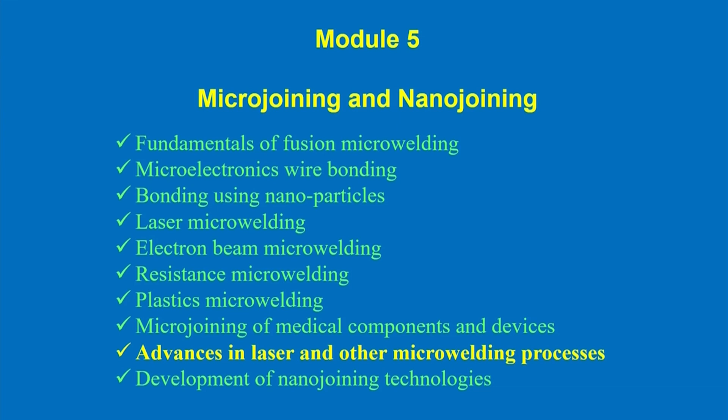All the different micro joining and nano joining technologies exist in the current perspective, that means depending upon current applications. First I will try to cover the fundamentals of fusion micro welding processes.

Although the basic features of fusion welding are already known to us, specifically this fusion micro welding, we will discuss in what aspect it can be applied in micro scale processes.

Second, different micro electronics wire bonding we will try to discuss, because nowadays the electronics industry involves a lot of joining processes.

Then bonding using nanoparticles we will try to cover, and then we will be covering laser micro welding processes, using laser as a source for welding. It is known to us, we have the idea about different laser welding technology, but how this can be used in micro scale applications, we will try to focus on in this module.

Next, electron beam micro welding. We know that electron beam is normally used when there is a need of high depth of penetration, specifically for high thickness material, but electron beam can also be applicable for micro scale welding processes. In this case we need to use this source of electron beam in a different way. We will try to discuss these aspects.

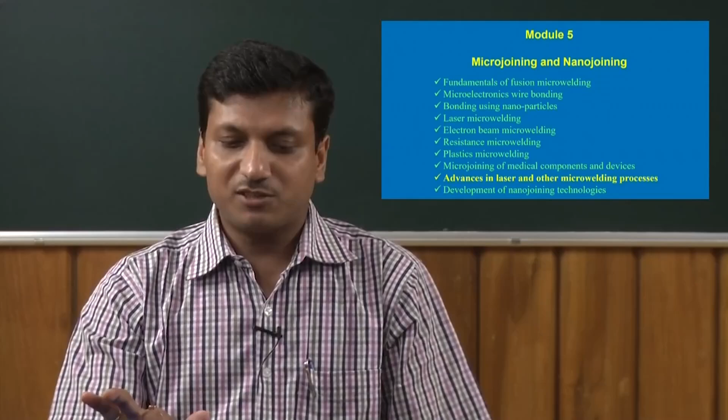Now, if we see the difference in these two cases, in microplasma arc welding process, the dimension of the fusion zone or size is different from the laser welding processes. Of course, in all these cases the materials are same. In all these cases what we have done is we have tried to join two different sheets of titanium alloy.

So, grade 5 titanium alloy is formed in the form of a butt welding configuration, and we use different heat sources. In one case we use plasma source, in another case we use laser as a heat source, but we find there is a significant difference in the shape and size of the fusion zone. This is possible because the concentration of heat in these two cases is different, and that depends on the different welding technologies.

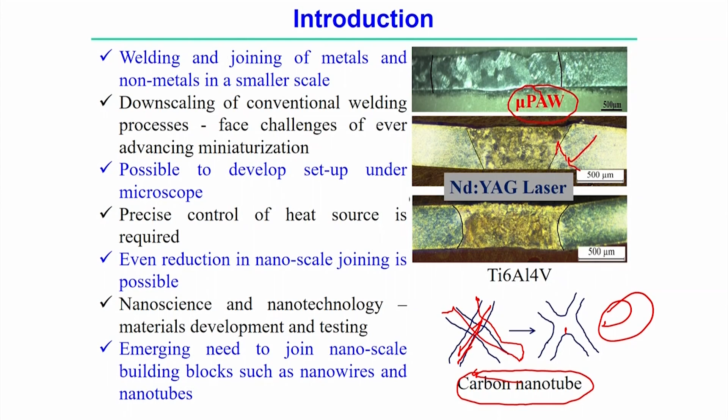So this type of joining, we can say, is nano joining, and you can imagine how precisely it is necessary to control the nano joining process.

Now what is the definition of micro joining or nano joining processes? Joining means welding, brazing, soldering, bonding, all together can be considered as joining processes. Specifically, welding is when we try to fuse two materials, and if we reach the melting point temperature, and after melting the solidification occurs between the materials and it comes back to room temperature, that type of joining is called welding, in general.

There may also be mechanical joining, for example fastening, riveting, crimping, which also comes under joining processes, but here we will focus only on welding, brazing, soldering, and specifically solid state bonding processes at different scales - two different scales of all these joining processes.

One is the macro scale, another is the nano scale. There is no strict definition of micro joining, it's mostly related to conventional welding and joining processes, but the only difference is the characteristic dimension. We can differentiate from conventional welding to nano joining or micro joining processes.

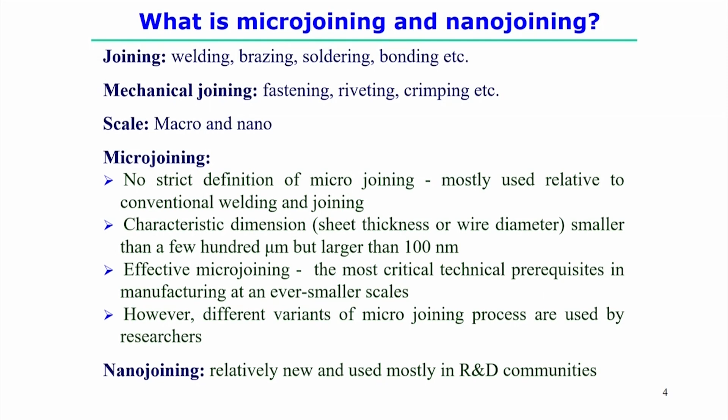We will try to see what are the different micro joining technologies presently being used, and what are the developments of different micro joining technologies up to the current date. We will try to see that.

In another aspect, nano joining is an almost new aspect mostly used in R&D laboratories. Commercially, we do not yet use these nano joining technologies, but it is evolving, and maybe we can use these nano joining technologies for nano devices or nano electronics.

Before looking into the different technologies and techniques that exist in micro joining or nano joining, we will try to see what mechanisms or principles are responsible, or what way we can explain the different nano joining processes from the basic principle or mechanics.

To start with the basic mechanism of the micro joining or nano joining process, we can consider two ideal surfaces, both perfectly clean, meaning there is no oxide layer on the surfaces and they are atomically flat. Atomically flat means that if we see at the atomic scale, the surface should appear completely flat. This is of course a very ideal case, but in this ideal case, if these two surfaces come together, they spontaneously join by the interatomic forces.

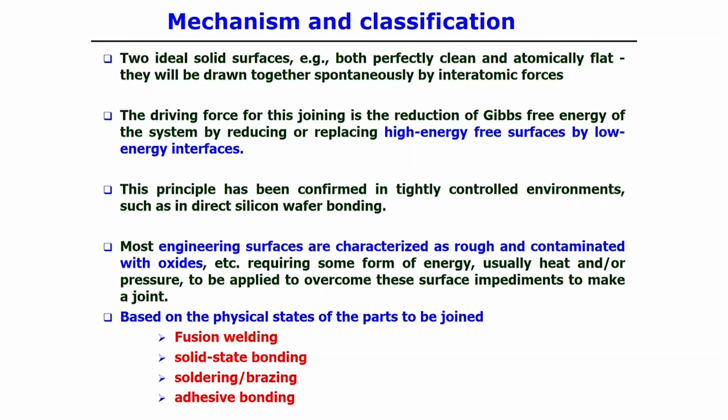Based on this principle, or the physical states between the two parts to be joined, specific to micro joining processes, we can divide micro joining into four classifications: fusion welding, solid state welding, soldering or brazing, and adhesive bonding.

All these types of welding technologies exist in conventional welding processes, but only these four types of methodologies exist in micro joining. So micro joining in general can be grouped according to traditional welding processes, into these four types. But the question is, is this classification applicable for nano joining processes as well?

Let us see. If we look at this table of typical micro joining and nano joining processes, we see solid state bonding, soldering, brazing, fusion welding, and adhesive bonding. Under solid state bonding we have different types: wafer diffusion, ultrasonic wire bonding, cold welding, explosive welding, friction stir, and friction welding.

Next, under soldering and brazing we have diffusion, furnace, induction, laser, reflow resistance, wave, vapor phase, and fluxless soldering. All these welding processes belong to micro joining, under the category of soldering or brazing. Next is fusion welding.

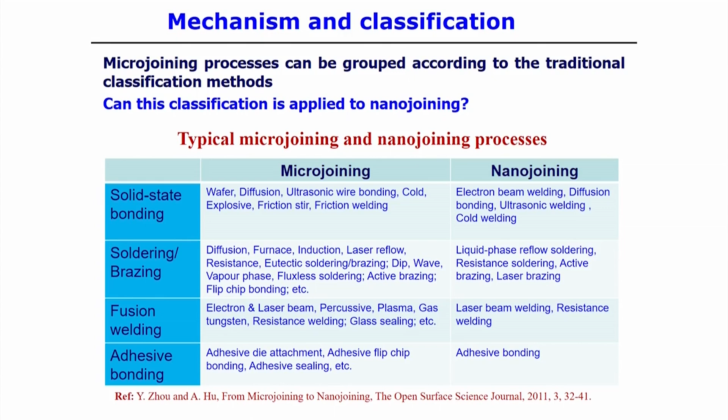Next, laser beam welding and resistance welding are typical nanojoining processes under the categorization of fusion welding process. Finally, adhesive bonding can also be applicable in case of nanojoining processes.

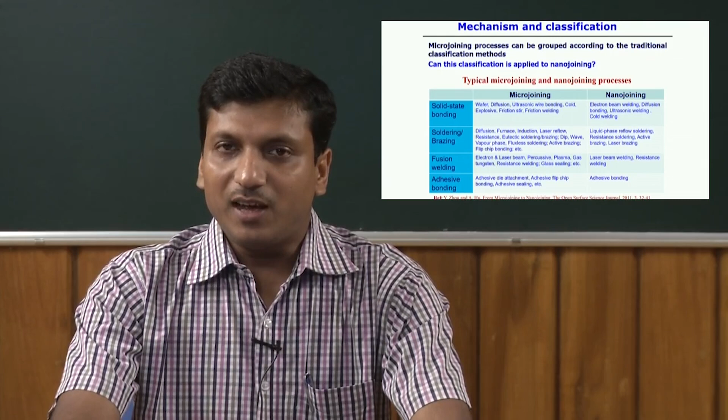Of course, different nanojoining technologies have also developed, and are still developing, but there is a little bit of difference as compared to conventional welding processes, or maybe with respect to microjoining processes. These typical aspects we will be discussing at the respective point of time.

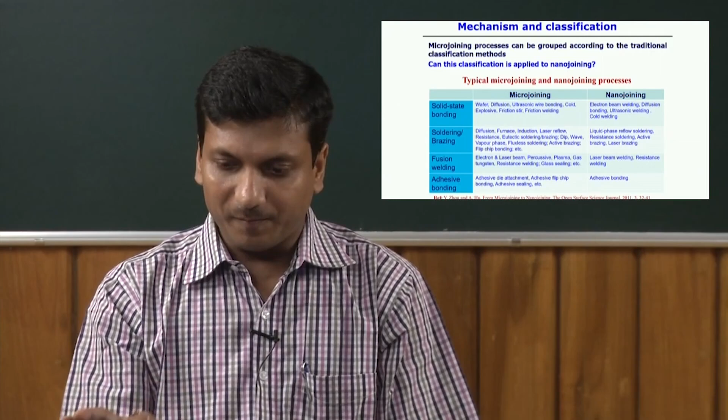Now focus on the fundamentals of fusion micro welding. What are the different techniques for micro welding processes? We already described the different types, but what are the basic needs for the development of the technology for micro welding processes?

First, we need to control different variables very precisely, such as voltage, currents, and travel speed. This is also applicable in conventional welding processes, but it is still very important in micro welding processes. For example, we can use laser in micro welding, but it is more useful if we consider the pulse mode of energy, because compared to continuous energy, pulse mode energy is applied for the microjoining application in a very controlled way.

In a pulse, if you look into this picture, during the pulse-on time we generally apply the thermal load to the sample or specimen, and during the remaining time solidification happens again.

Basically, if we see the average power, it is also below the peak power, as shown in this figure. So here we can say that ramping of the power is possible in the pulse mode of laser welding process, and by ramping the power we can use laser specifically for the micro welding process, which is very much similar to the conventional welding process as well.

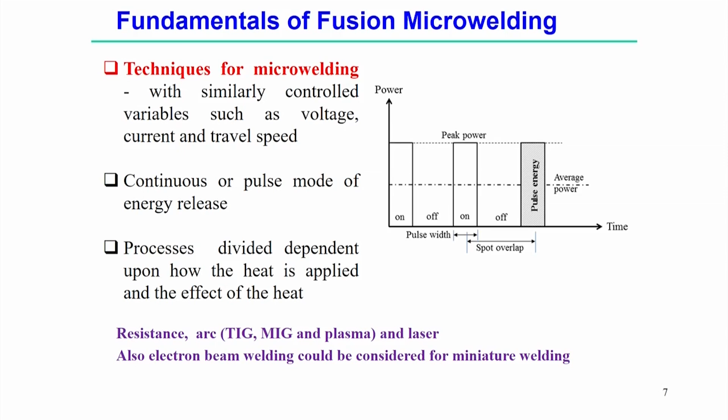So laser can also be used for micro welding processes. Of course, electron beam welding can also be considered for micro welding application, but the prospect is different - in a different or more controlled way we can use the electron beam for micro welding application.

So fusion micro welding can be further defined as: when the sheet thickness of the materials is less than 0.5 millimeter, or the tubular material diameter is less than 1 millimeter in diameter, that can be considered a fusion micro welding process. So geometric size is restricting the definition of micro welding process as compared to conventional welding process.

But the basic phenomena of the formation of the fusion welding process: first is the application of the heat source, that means thermal aspect. Then mechanical aspects, meaning how efficiently it is possible to design the fixture and holding devices to hold the sample or move the sample - that is the mechanical aspects.

Finally, what type of residual stress and distortion level is achieved in case of micro welding processes, that comes under the mechanical aspects. And finally the geometry aspect, that means the shape and size of the samples which we are supposed to process in micro welding applications.

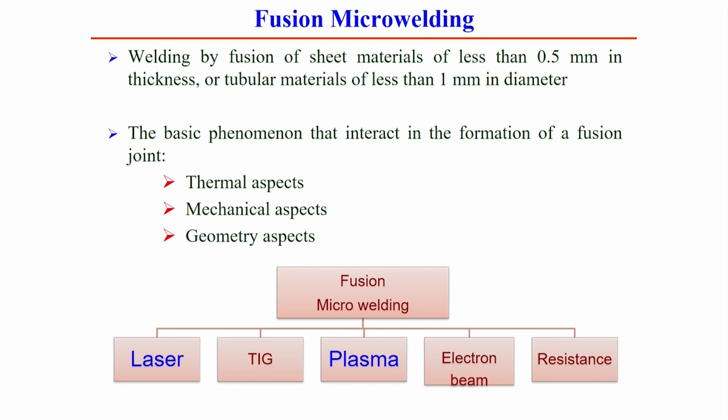So fusion micro welding, these are the typical welding processes we use. One is laser, mostly used. TIG welding process, TIG means tungsten inert gas welding, or GTAW, gas tungsten arc welding process, can be used for the micro welding application. Then plasma, or microplasma arc welding, can also be used for micro welding applications. Then electron beam and resistance. So these five types of fusion welding processes are applicable for the different micro welding processes.

Let us look into the typical application area of the micro joining processes. Mostly microelectronics, medical, aerospace and defense industries have a lot of applications of different micro joining technologies. Definitely packaging and other interconnects in MEMS, micro electromechanical systems, is where we generally find this application of micro joining.

Other applications include medical implants, lamps and lighting assembly, jewelry industry, dental applications, aerospace, batteries, thermocouples, wires, TV parts, sensing devices, electronics, instrumentation, and also molds, tools and many other small component work we are supposed to join.

In these cases we find this typical application of micro joining processes following the different micro welding processes. It may be a fusion micro welding process or it may come from other micro welding techniques.

Resistance micro welding - sometimes we use this process, but in this case it is mostly used for joining non-ferrous materials, specific to micro welding applications.

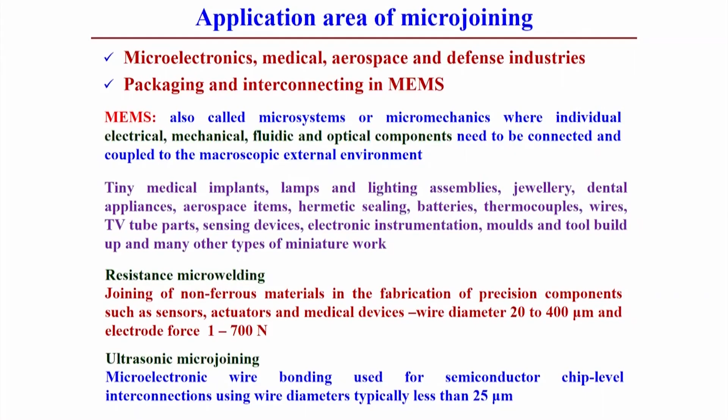Now we look into that. It is also used in MEMS, micro electromechanical systems or micromechanics, where the individual electrical, mechanical, fluidic and optical components need to be joined. So all of these need to be connected.

You can use different micro joining technologies, and specifically in this MEMS application there is a combination of metallic and non-metallic or different types of components. So there are different types of micro joining technology that are specifically used in case of MEMS.

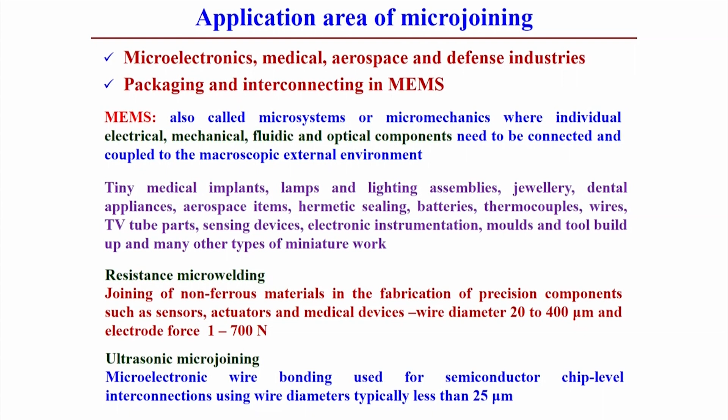Now again, if we come to fusion micro welding processes, arc welding is an important joining process. We know that for several decades arc welding has been one of the most leading welding technologies, generally used in conventional welding processes, but this arc welding can also be applicable in case of micro welding process.

In this case it is very much required to have very regulated and controlled output of less than 1 ampere arc current, the current used to create the arc welding process can be controlled at that level, maybe less than 1 ampere, then it is applicable in case of micro welding processes.

Mainly gas tungsten arc welding and plasma welding are used for different micro welding applications, but in this case it can also be used in continuous mode as well as pulse mode of the arc can also be possible to use in micro welding applications.

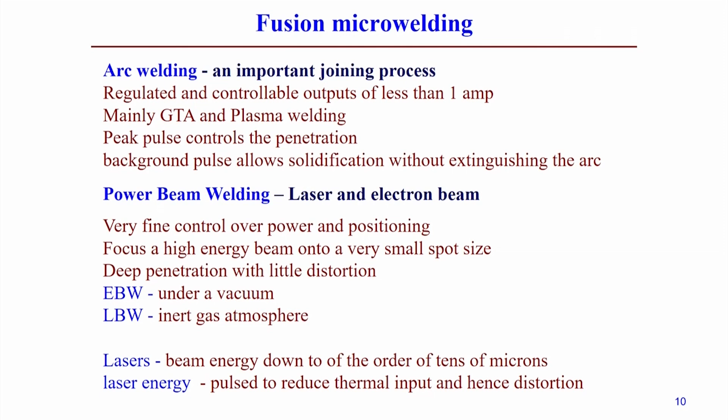Of course, power beam welding is another categorization of the fusion micro welding process. Here we can use laser or electron beam. Very fine control of the power and positioning is required in this case, and we know that both laser and electron beam can be focused in a very small area.

That's why there is a wide application observed in case of micro welding process, specifically for laser. At the same time, deep penetration with low distortion type of welding can also be possible using both laser as well as electron beam.

The difference between laser beam welding and electron beam welding is that electron beam welding, all the melting phenomena happen under vacuum. So there is no interaction of the outside atmosphere during the welding process, which is advantageous to get a very good weld joint.

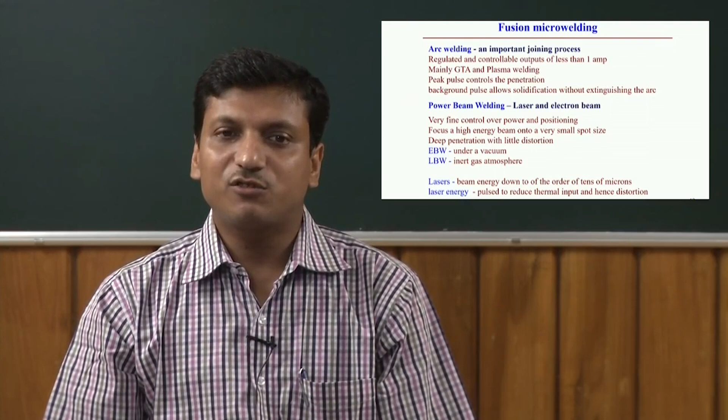Laser beam welding also occurs under an inert gas atmosphere, which reduces interaction with other atmospheric elements in the welded joint. So here also we can produce a very good weld joint, but it has unique advantages as compared to the electron beam welding process.

Looking at typical characteristics of laser welding, laser light is generally used for micro welding applications with pulse duration at the millisecond level. It is also possible to generate ultrashort pulses at the femtosecond, picosecond, nanosecond, and microsecond levels. But conventionally, micro welding applications use pulses from the millisecond down to the femtosecond level.

The basic advantage of laser welding is that it is a non-contact mode, and since the heat is concentrated in a very small zone, the size of the fusion zone and heat affected zone is very small. So during welding it may not affect surrounding materials, which is why laser welding is very popular and useful specifically for micro welding processes.

Compared to laser welding or electron beam welding, microplasma arc welding is another variation of micro joining, relatively low cost compared to laser welding. Nowadays microplasma arc welding machines are available with low amperage capability, meaning even at the level of 1 ampere current it is possible to control using that machine, making it applicable for micro welding processes.

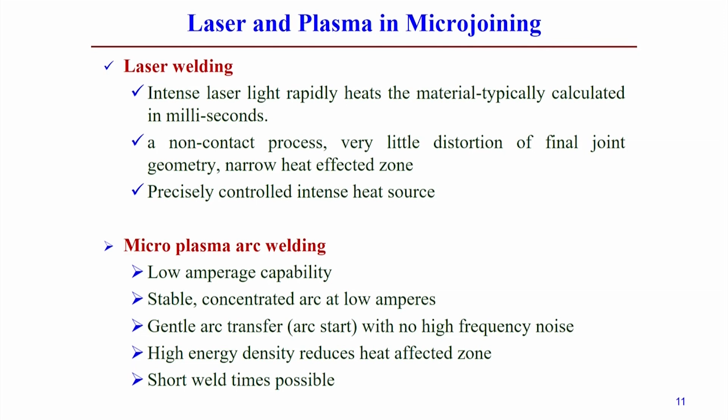Apart from this, a stable and concentrated arc is also possible even at low ampere current. That is the basic advantage for which microplasma arc welding was developed for micro welding applications. The gentle arc transfer happens with no high frequency noise, and high energy density reduces the heat affected zone, though not as much as laser. Short weld time is possible, but not comparable to laser in quality, only in cost. Still, microplasma arc welding is a secondary option for micro welding applications.

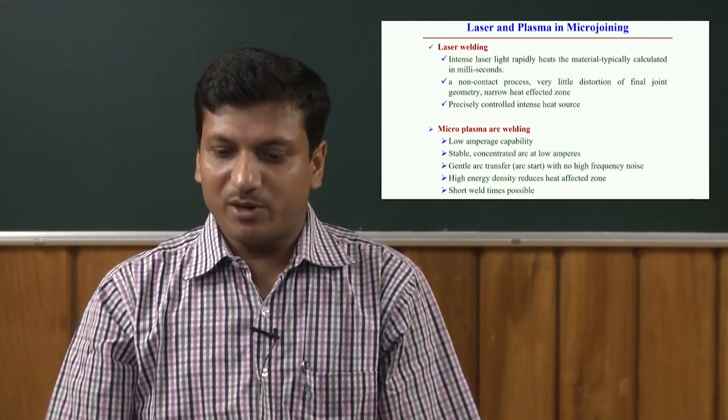Apart from fusion welding processes, several micro welding technologies exist in the case of solid state bonding. So what are the typical characteristics for solid state bonding, or what do we generally observe in this process?

First, there is no melting at all of the material during solid state bonding, and joints are made from the plastic flow of the material, with or without the aid of external stirring of that plastic flow.

In friction welding, heat is generated due to friction. In friction stir welding, heat is also generated due to friction, but joining happens mostly by the stirring action of the tool. We already know the basic mechanism of friction stir welding, and the same mechanism applies here in micro welding processes.

Other types of micro joining processes are ultrasonic vibration, friction welding, and diffusion bonding. These are the three types of non-fusion solid state bonding generally observed in micro welding applications.

Now we will start with friction welding. The principle is that heat is generated by friction, and after the generation of heat, if we apply small pressure, the material can be joined, or if we apply some stirring action of the plasticized material, the material can be joined with respect to each other. That type of joining process is called friction stir joining or friction stir welding.

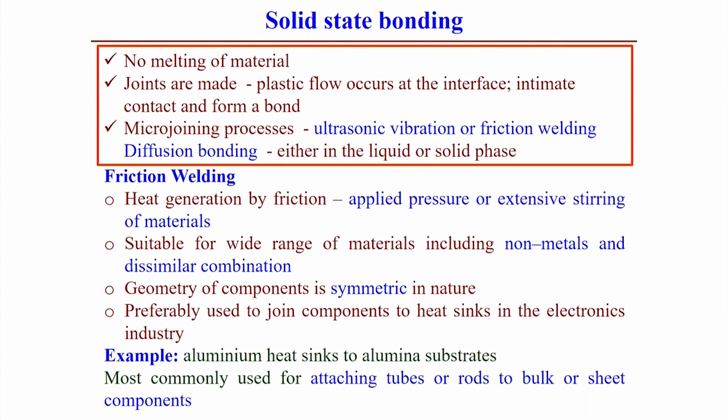One typical application for friction welding is joining components to heat sinks in the electronics industry. For example, aluminum heat sinks to alumina substrates are normally joined using the friction welding process.

Now, with the same principle as the friction stir welding process, nowadays the micro friction stir welding process has also been developed. It is simply a downscaling of the friction stir welding process, and we define micro friction stir welding in terms of thickness, which is less than 1000 micrometers, or maybe at a similar dimension.

Typical applications include thin wall structures, electrical, electronics, and micro mechanical assembly. It is always advantageous as compared to the fusion welding process, and specifically the solid state friction stir welding process is applicable for joining dissimilar materials.

CNC programmable micro milling machines can also be used to develop friction stir welding machines. Like the conventional friction stir welding process, normally it is possible to convert a milling machine using the principle of the rotating axis. A similar kind of principle can be followed, but in this case CNC controlled micro milling machines can be converted to the micro scale friction stir welding process.

But the challenge is that there is always a hole left out at the weld. To remove this difficulty in case of micro friction stir welding, some strategies can also be considered. Another difficulty or challenge is that it is scale sensitive, and careful selection of the tool design and fixture is really necessary for a successful friction stir welded joint.

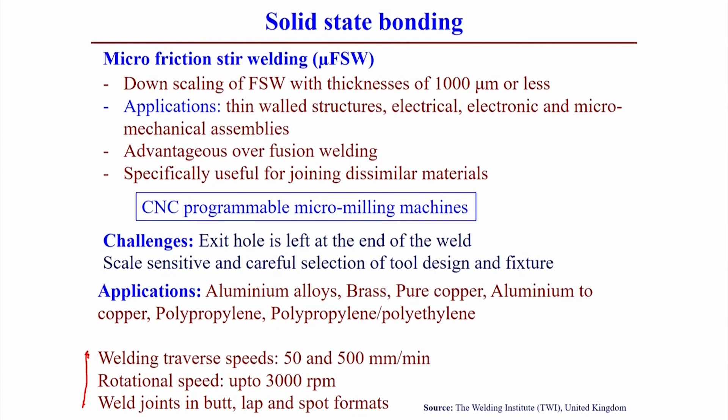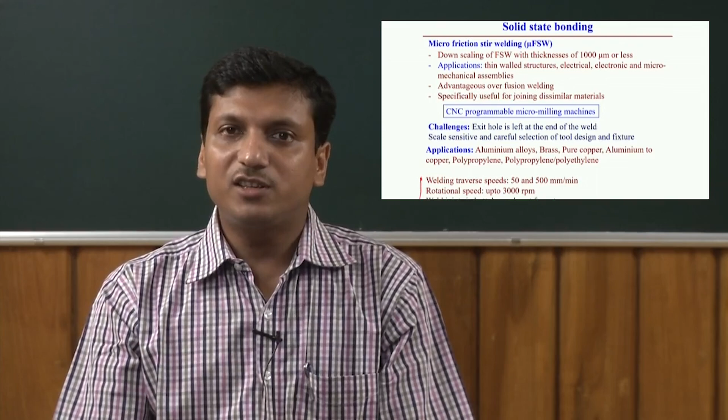If you see the typical parameters used for the friction stir welding process, first is welding speed around 50 to 500 millimeters per minute, rotational speed at maximum 3000 rpm, and weld joints can also be formed in butt, lap, and spot formats. But micro friction stir welding is still at a developing stage, specifically for other types of materials, and work on many dissimilar combinations of materials is still going on.

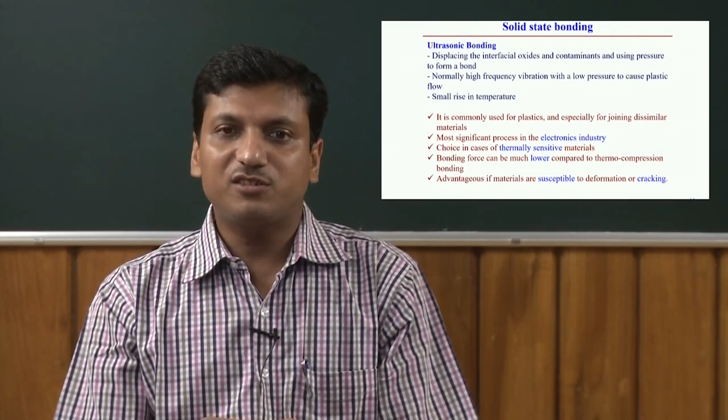Now I come to that point, solid state bonding process. One typical solid state bonding process is ultrasonic bonding. In this case, to join different materials, ultrasonic vibration is responsible. First it tries to remove the oxide layer from the surface, and then application of pressure forms the bond between the two materials.

The high frequency vibration is the main driving force, along with low pressure, that causes plastic flow of the material and interlinking of the two different types of materials. But this process is subject to a small increment of temperature; a small temperature rise may happen during this process.

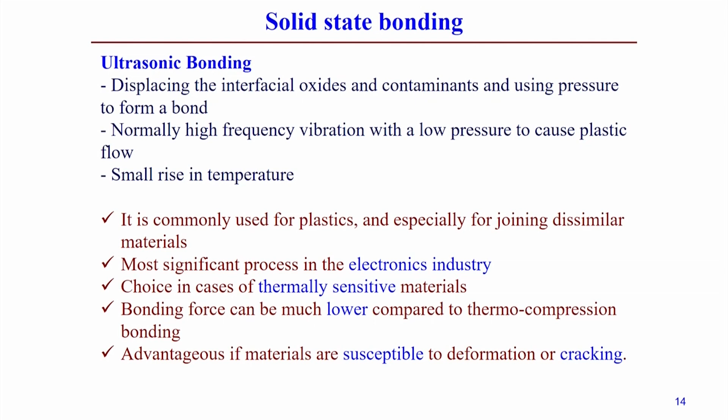This type of process is mainly used for plastics, specifically for joining dissimilar materials, and the most significant application we find for ultrasonic bonding is in the electronics industry. This process is preferable specifically for thermal sensitive materials, or metals that tend to form cracks, so in that case this ultrasonic bonding may be applicable.

Another solid state bonding process is diffusion bonding. Diffusion bonding means that when atoms of the two solids come into contact, there is diffusion between them, which is a function of time, temperature and pressure. So time, temperature and pressure are responsible for the diffusion bonding between the two metals.

Sometimes heat may or may not be required, but if heat is required, it's probably 50% to 70% of the melting point temperature, and high pressure is required, which should be maintained for a long period of time to allow atomic diffusion between the two metals.

The main concern of diffusion bonding is the cleanliness of the surface. Before joining the two metals, it is necessary to clean the surface between the substrate materials. After cleaning, when they come into contact, high pressure over time causes diffusion of the atoms, and finally it forms the bonding between the two metals.

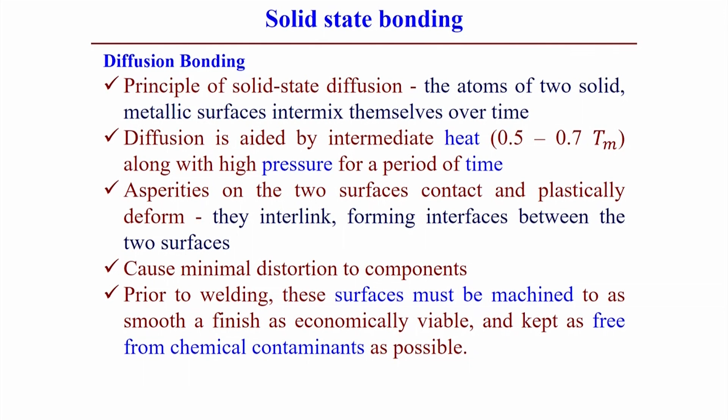In this type of bonding, the surface must be machined as smooth as possible, so that the time requirement for diffusion of the atoms will be less.

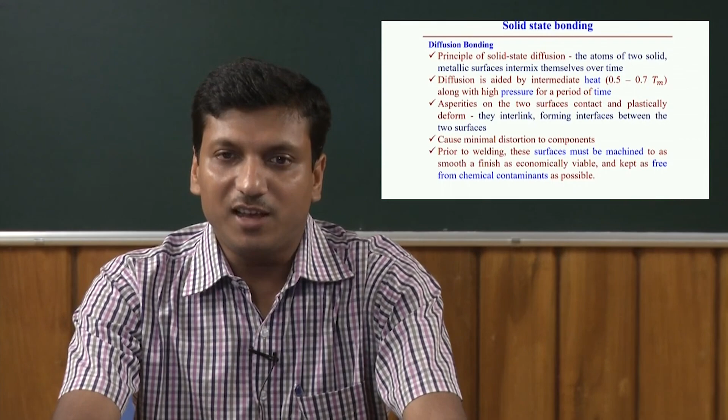Diffusion bonding is widely used in joining high strength and refractory metals, and joining alternating layers of thin metal foils, which can generally be joined by this mechanism. Typical materials include titanium, beryllium, and zirconium, used in electronics, aerospace, and the nuclear industry.

This process is applicable. Now let me show a little about the mathematical aspects of diffusion bonding. According to Fick's law of diffusion: J equals minus D into dc by dx.

Here J is the diffusion flux, D is the diffusion coefficient, and dc by dx is the concentration gradient. So we can estimate the diffusion flux J.

This equation can also be compared to Fourier's law of heat conduction. We generally use Fourier's law of heat conduction, that heat flux Q equals minus K into dT by dx.

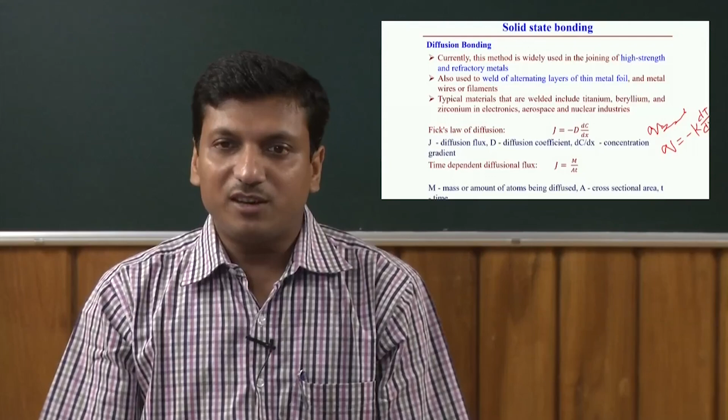Here Q is the heat flux, K is the thermal conductivity, and dT by dx is the temperature gradient. This equation decides that with the application of flux, what temperature gradient develops within the body itself, controlled by the property called thermal conductivity.

A similar equivalent equation can be applied from Fick's law of diffusion. Here also, the time-dependent diffusional flux can be estimated by the amount of atoms being diffused over time t.

So J equals m by A into t, where A is the area of contact between the two surfaces, t is the time, and m is that amount of diffused atoms.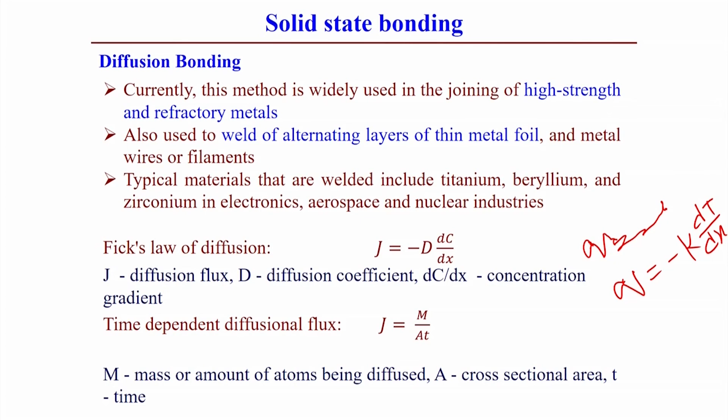From these two equations we can find the time requirement for diffusion bonding of the two samples, estimated as minus 1 by D, m by A, and 1 by dc by dx. So basically the time requirement is inversely proportional to the diffusion coefficient and the concentration gradient.

If the diffusion coefficient is very high, the time requirement will be less, and if the concentration gradient is very high, the time requirement for bonding will also be less. So the time requirement depends on these two parameters, but the diffusion coefficient may not be constant.

It also depends on temperature, or it is a function of temperature. So D can be expressed as D0 into e to the power of minus Qd by RT.

Here Qd is the activation energy for diffusion, R is the universal gas constant, T is the temperature of the process, and D0 is a constant independent of temperature, which also depends on the materials being joined.

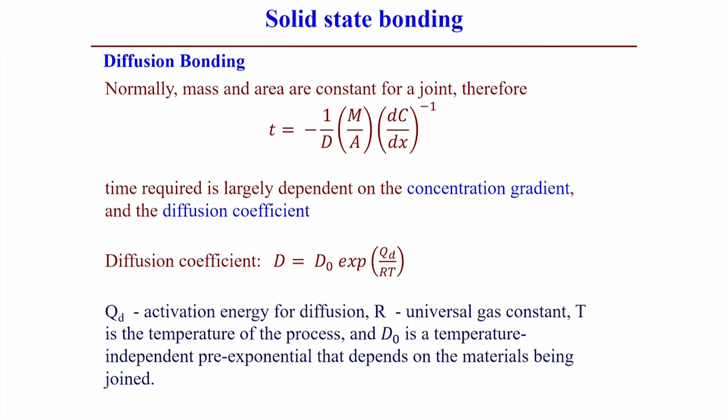From this expression we can estimate the diffusion coefficient if the other parameters are known, or the time requirement for the diffusion bonding.

Now we come to soldering and brazing. This is another typical micro joining process, a conventional joining process applicable for micro joining cases. In soldering and brazing, we use another material, either a second material for similar joining processes or a third material for dissimilar joining processes.

A low melting point material is used to join the two metals, flowing into the gap between the components by capillary action, but without melting the parent components. This is the basic mechanism for the soldering or brazing process.

The difference between soldering and brazing lies in the second or third material used, or what is the melting point of that material. Soldering is considered when the joining process occurs below 450 degrees centigrade, and brazing is considered when it occurs above 450 degrees centigrade. Based on this temperature we can differentiate soldering and brazing processes.

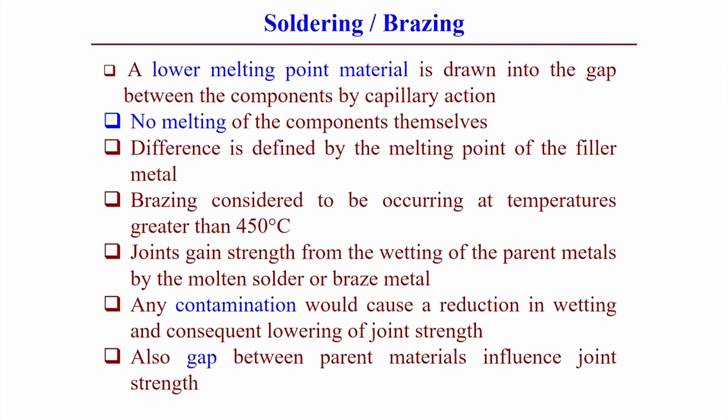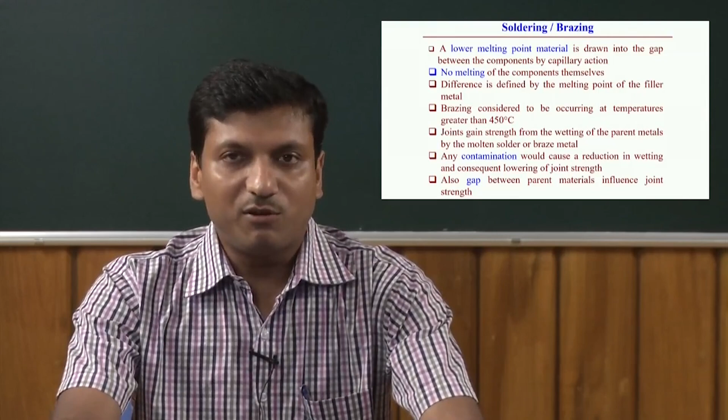We can see a lot of application of the soldering process in the electronics industry, but the joint strength actually varies depending upon the contact between the two parent metals. The molten solder or brazed metal tries to wet the parent metals, but any contamination may cause a reduction in the wetting action and consequently the joining strength. Also, the gap between the parent metals influences the amount of joint strength when you join using soldering or brazing.

Both similar and dissimilar materials can be joined using this technique, but soldering primarily finds application in the electronics and electrical industries, used in printed circuit boards to make connectivity within them.

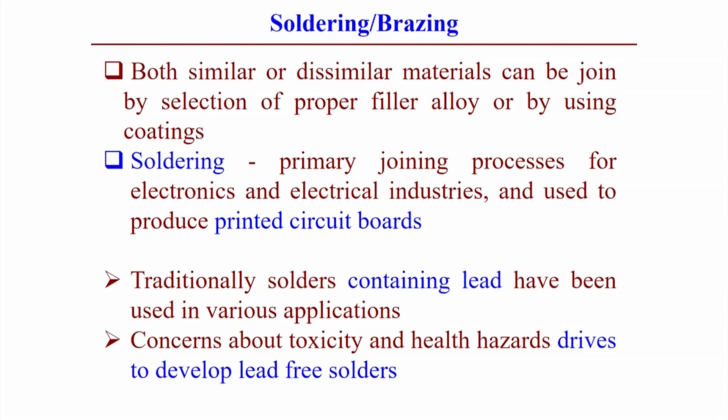One major concern of traditional solders is that in most cases they contain lead as a component, which has been used in various applications. We know lead is a health hazard component, so nowadays we try to find alternate arrangements for solders. We will see what alternate arrangements can be done using different solder materials.

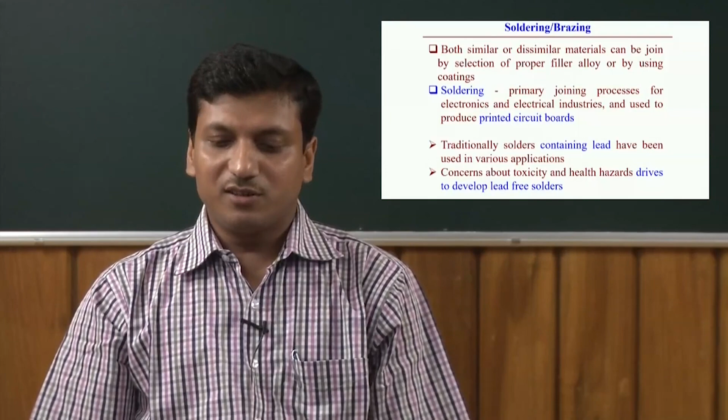Now another joining technique called adhesive bonding. Adhesive bonding basically depends on the attractive forces between the molecules at the surface of the adhesives and the surfaces to be joined. However, the larger the molecules, the better the adhesion, which is why organic adhesives are mostly preferred for adhesive bonding of two materials.

Liquid adhesives are also used to wet the surfaces to be bonded. After using these liquid adhesives, they need to cure, and after that they become harder, forming a solid bond.

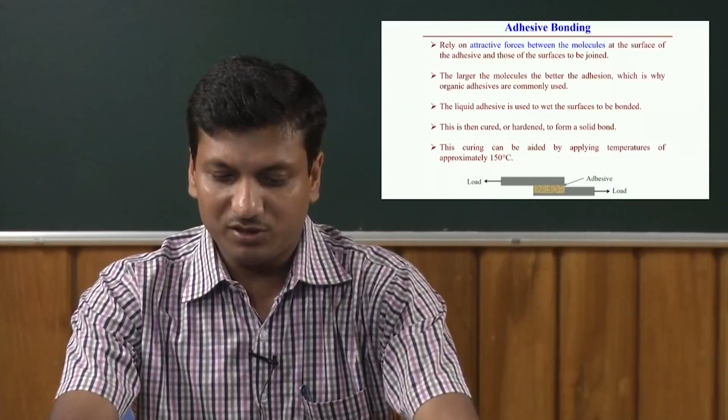Sometimes the curing can be aided or accelerated by the application of temperature, normally around 150 degrees centigrade in certain cases. In the pictures, we see the adhesive between two different samples, and the adhesive placed between these two samples forms the joining of the two metals.

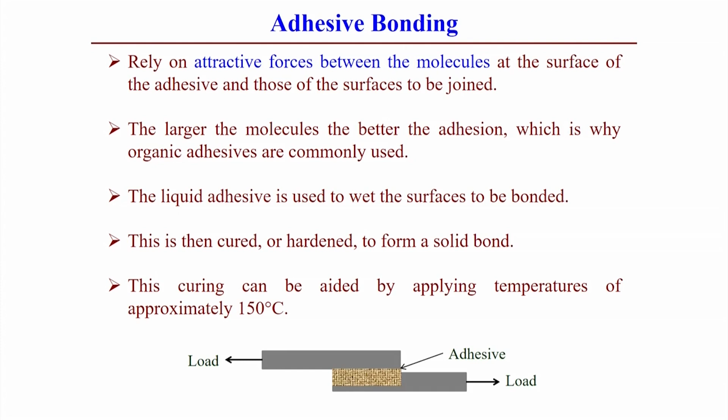Like in brazing and soldering, the thickness of the adhesive is also important, because the minimum the thickness of the adhesive, the more the joint strength will be. But if we increase the thickness of the adhesive, the joint strength can decrease.

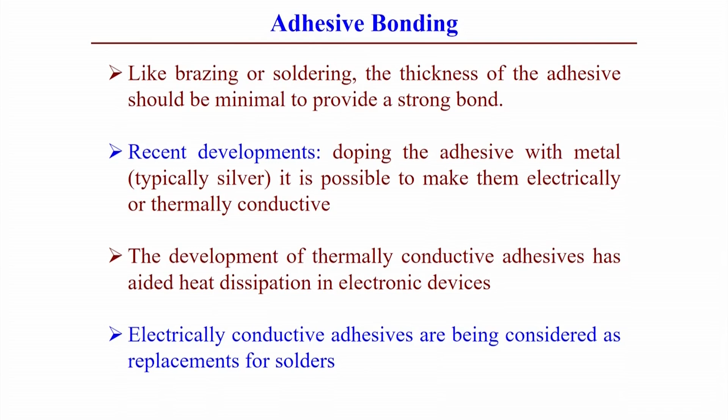Recent developments in adhesive bonding use adhesives containing metals, typically silver, which makes it possible to create electrically or thermally conductive adhesives. The development of thermally conductive adhesives has a greater heat dissipation rate in electronic devices. That's why these conductive adhesives can be a replacement for solders, and nowadays this kind of adhesive is typically used for several other micro joining applications.

Now we come to microelectronics wire bonding. It's a joining between an integrated circuit or other semiconductor devices, and wire bonding is the most cost-effective and flexible interconnect technology. Wire bonding can also be used even for high frequency applications of the order of gigahertz.

What is the principle of wire bonding technology? It follows the ultrasonic welding process, where the bond head oscillates at ultrasonic frequency, scrubbing the two materials together and forming a weld. The bonders are capable of making a bond almost every half second, so the process is very fast.

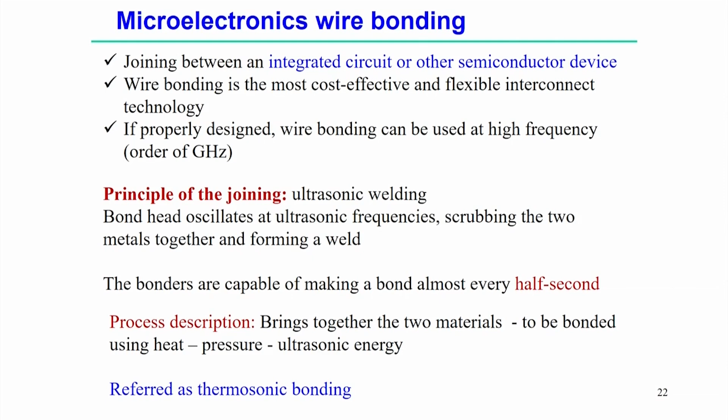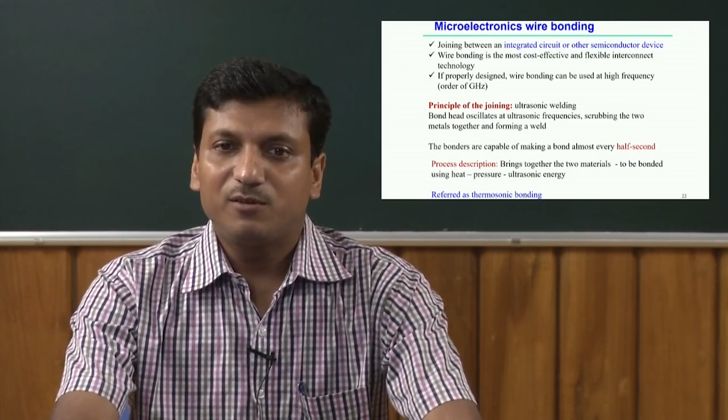What is the mechanism of this process? Wire bonding brings together the two materials we need to connect, and they are bonded using either heat, pressure and ultrasonic energy, either a combination of these, or without any heat, only pressure and ultrasonic energy can also be applicable for bonding. When we use ultrasonic energy as well as temperature, that is called thermosonic bonding.

Typical materials found for bonding in the microelectronics industry are aluminum, copper, silver and gold. Mostly the size of the wire is around 15 micrometers to 100 micrometers, but recent tendencies show the choice of wire changing from gold to copper. Gold has good thermal and electrical conductivity, but the cost is very high, so nowadays gold is being replaced by copper.

If we see the typical characteristics, advantages or disadvantages of using copper, first is that copper is harder than gold and aluminum.

This is the positive point, but there is a formation of oxides which is inherent with this material. So to protect this joining process, to bonded joint, special packaging is required in order to protect the copper wire. But palladium coated copper wire can also be used as an alternate, which has shown significant resistance to corrosion. So that's why copper can be a replacement of gold, of course with some negative sides, but it is comparable to that.

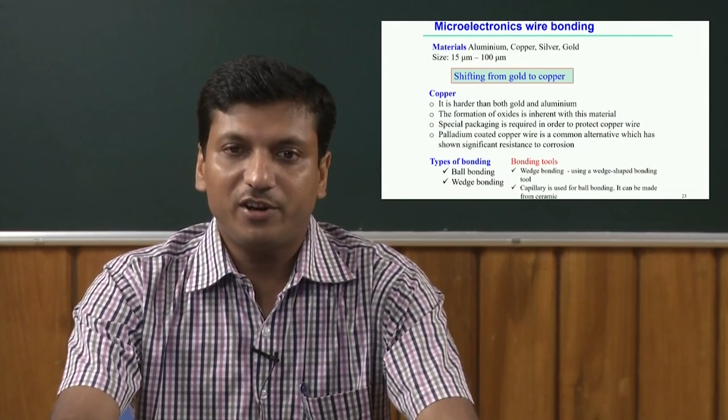Now mainly two types of wire bonding we generally observe. One is ball bonding, another is wedge bonding. Two different types of tools can be used. In wedge bonding, we use a wedge shaped bonding tool, like a sharp edge, and for ball bonding we use a capillary, which is made mostly from ceramics.

If you see in this figure, the typical characteristics of wedge bonding and ball bonding. Normally wedge bonding is performed using aluminum wire, and the wedge is bonded at one point using ultrasonic energy. Definitely in wire bonding, the source is the ultrasound, the vibration from the ultrasound, so ultrasonic energy can be used for wedge bonding.

But wedge bonding doesn't involve any temperature as an added thing. This happens at room temperature, and the drawing of the wire when you do wedge bonding becomes directional in properties. That means in a specific direction that joint strength can be good, so if you want to draw the wire, it should be in a specific direction, not any direction.

Ball bonding, on the other hand, is characterized by the thermosonic process, because apart from the ultrasonic energy, some heat is required to get the ball bonded sample.

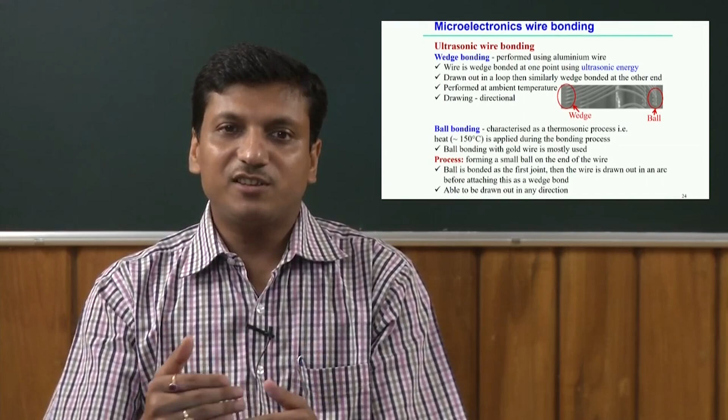Mostly ball bonding uses gold wire, and a small ball is formed at the end of the wire. Once the ball is bonded at the first joint, the wire is drawn out by forming an arc, before attaching this as a wedge bond to the other part of the sample. So ball bonding is joined in such a way that it can be drawn in any direction, which is a limitation in case of wedge bonding, because wedge bonding cannot draw the wire in any direction. So that is the difference.

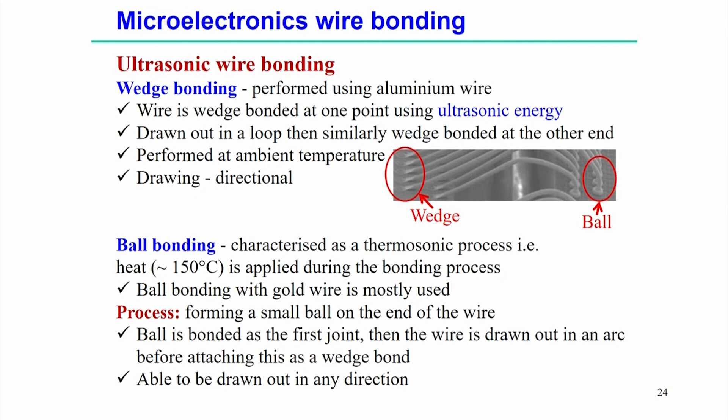Now if you look into this figure, you see wedge bonding is a kind of process where one wire is joined on the sample flat. And in ball bonding, here you see there is formation of a ball at the end of this joint. So these two types of process we use in the microelectronics industry.

Now the question is preference of ball bond or wedge bond, that means in which cases we can prefer wedge bonding and which cases we can prefer ball bonding.

Now if you look into the typical characteristics of this process, the ball size is approximately 2 to 3 times the wire diameter, but in case of high strength wedge bond, it is possible to only 2 to 3 micrometers wider with respect to the wire diameter.

Another difference between ball and wedge bonding is that one case is directional, another case is non-directional. So based on that, the preference of ball bonding or wedge bonding may also depend on other aspects like electrical characteristics of the package.

That means if you try to apply these processes, whether the surrounding items will be affected or not. In case of ball bonding, since apart from the ultrasonic energy, it involves some temperature, we need to apply temperature, so that may affect the surrounding material. So depending on whether heat application is required or whether it affects surrounding materials, we can choose whether we need to go for ball bonding or wedge bonding.

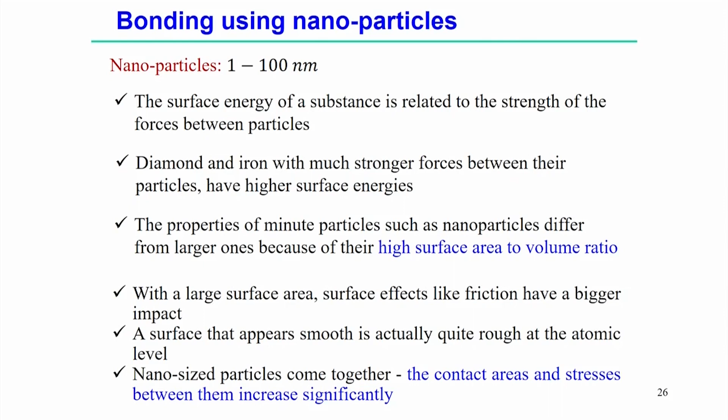With a larger surface area, the friction may be bigger, having a bigger impact. A surface that appears smooth may actually not be smooth, or may be rough at the atomic level. So when particles come into contact, the contact area and stresses between them increase significantly.

This mechanism can be explained in terms of the roughness of the surface at different scales - the surface roughness at the nano scale may be different from that at the normal micro or macroscopic scale. Since nanoparticles have higher surface area, this also impacts the surface energy.

It is having some impact on the joining of two metals as compared to conventional particles. Metal nanoparticles may have properties intermediate between those of metals and non-metals, but nanoparticles have different optical properties and are more sensitive to heat than large particles. A large surface energy of nanoparticles affects the surface atoms of bulk metals. So metal-to-metal bonding using nanoparticles can be considered, using them as a filler material. It may be possible to achieve significantly good bonding using nanoparticles even at low temperatures compared to fusion welding or diffusion bonding processes.

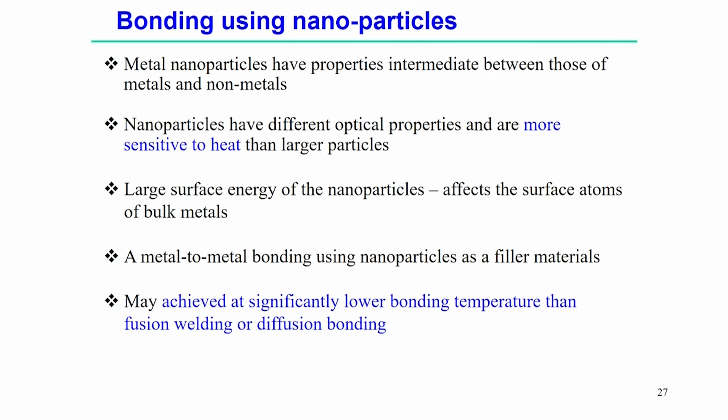For nanoparticles, we generally use composite silver consisting of silver metallo-organic nanoparticles and Ag2CO3 particles. Using these particles, it is possible to join various materials like gold, silver, copper, nickel, titanium and aluminum. It is possible to place a layer of nanoparticles between the two samples, apply some pressure, and if needed apply some temperature, holding it for a certain time. Then these two samples can be joined using the bonding formed by the nanoparticles.

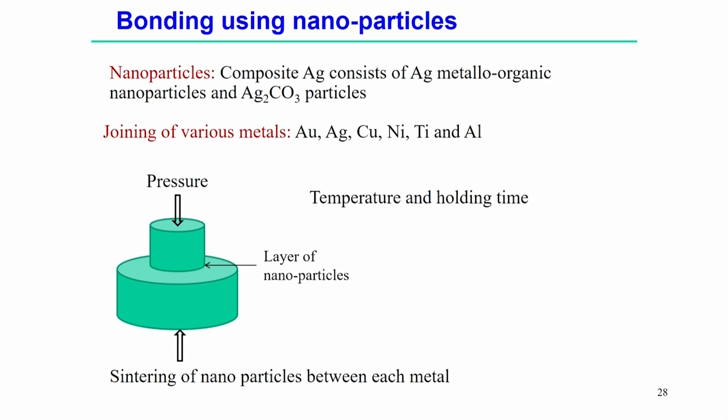Now, what are the basic mechanisms when we try to use nanoparticles? First, in general, when trying to join two surfaces, it is necessary to remove the oxide films, and once the oxide films are removed, active metallurgical bonding is possible between the two samples. Here, using nanoparticles, we try to achieve this.

Based on the shear strength of the joints, the order of bondability of each material is given here - silver, copper, nickel, titanium and aluminum. Basically silver, copper and nickel have good bondability compared to titanium and aluminum. This sequence follows identical to the order of the free energy value of oxide formation. If it is possible to remove the oxide layer more easily through reduction, then using nanoparticles we can obtain a very good joint compared to other welding processes.

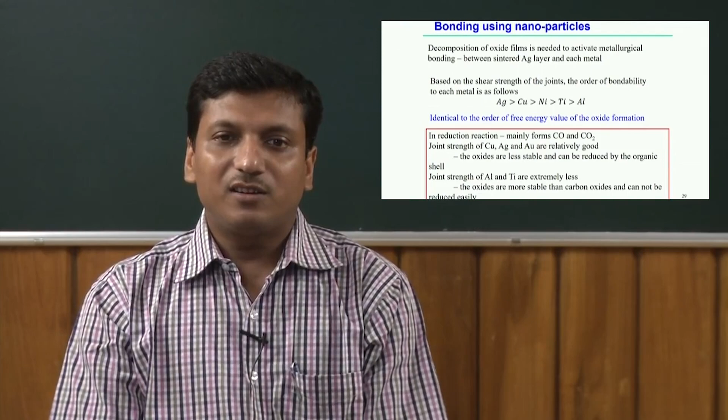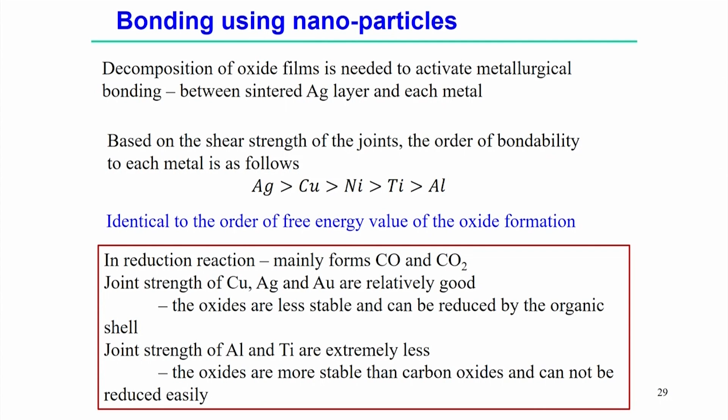In the reduction equations, it mainly forms CO or CO2. Joint strength for copper, silver and gold are relatively good because their oxides are less stable and can be reduced by organic shell. For aluminum and titanium, the joint strength is relatively less because their oxides are more stable, so it is not easy to form CO and CO2 and remove the oxide layers easily. That is why bondability is not good for these materials using nanoparticles.

So we have discussed the different types of solid state bonding processes and fusion microwelding processes in this session, and thank you very much for your kind attention.